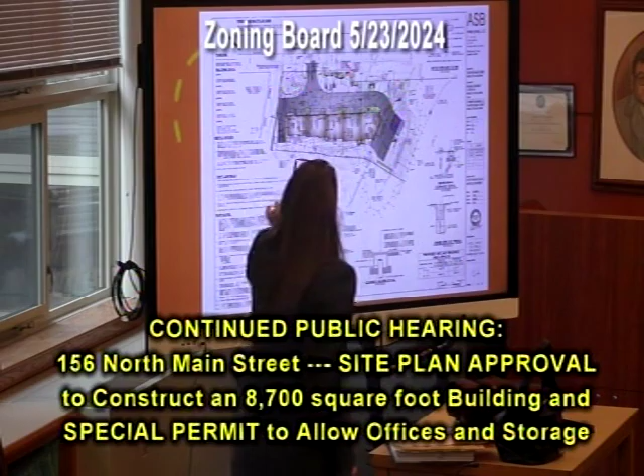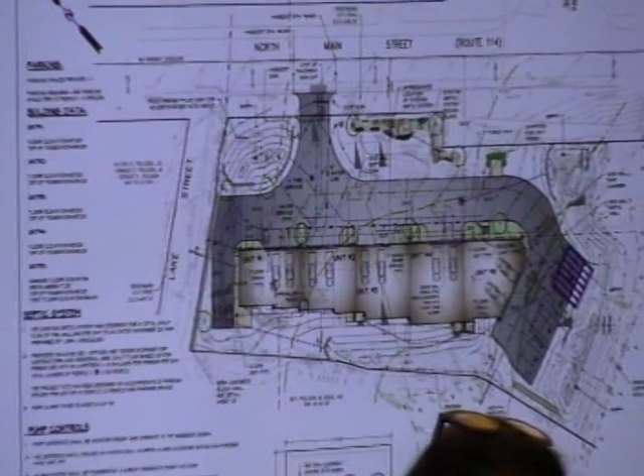So the first thing I'm going to go through is basically the overall site plan. One of the big questions was how do you address the need to have the tight tanks on the property, and where are the grates on the property. So we have a drainage trench in each of the units in front of the overhead doors, which is required by the plumbing code but hadn't been shown on the last plans. We showed them in front of each unit, including the one angled toward the back. All 4 of the front units discharge to one single tight tank located in this area, and unit 5 discharges to a single tight tank, hard to see, but it's right in this area. So we showed that we have sufficient locations to handle the sizing of those tight tanks and the need for drains inside each unit.

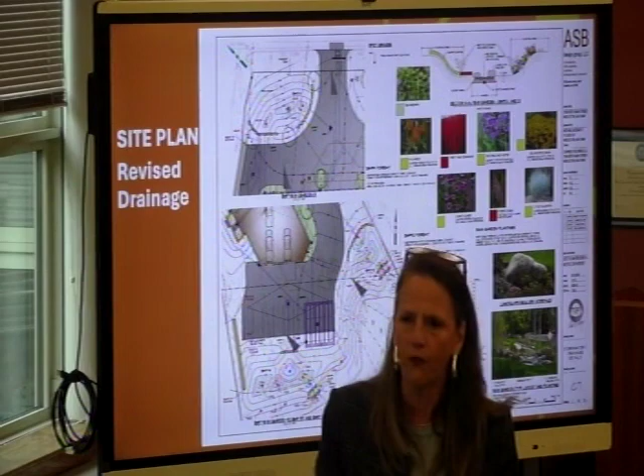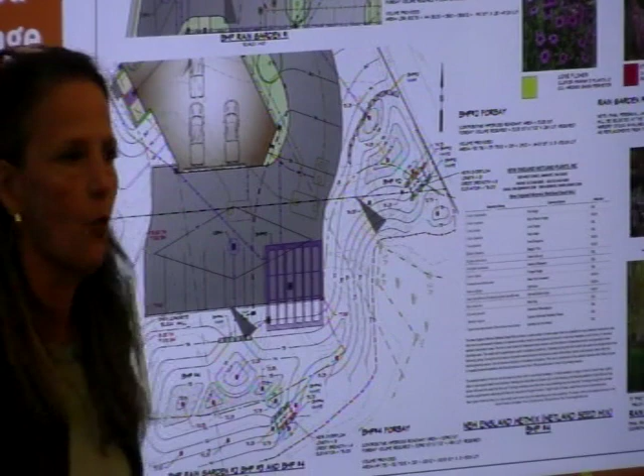The next issue was brought up by Mr. Renault, about overflow issues relative to a couple of the drainage basins - the model wasn't correct. So we had our engineer go back, look at it, and we submitted that earlier to you to take a look. What we have is the installation of a weir in this area, which is just a dam to hold back water and then allow it to flow so it doesn't just overflow, which was the issue raised by Mr. Renault. We have a weir here, and we have a weir here.

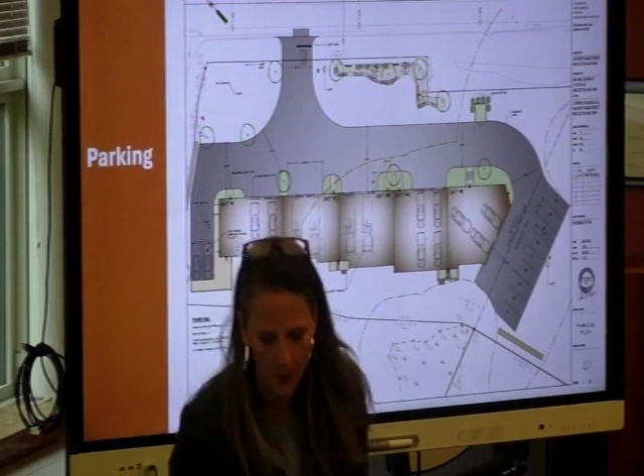The third issue that was brought up was some confusion relative to the parking. The parking is shown on sheet 5. That sheet set has so much information on it that it's difficult, so it's easy to miss something. Basically this sheet is just saying we can have a maximum of 12 employees on site, assuming 3 in 2 of the units and 2 in the rest of the units, for a total of 12 employees. At 1 per 1.2, we need 10 spaces, and we have 11, so we have more than we actually need.

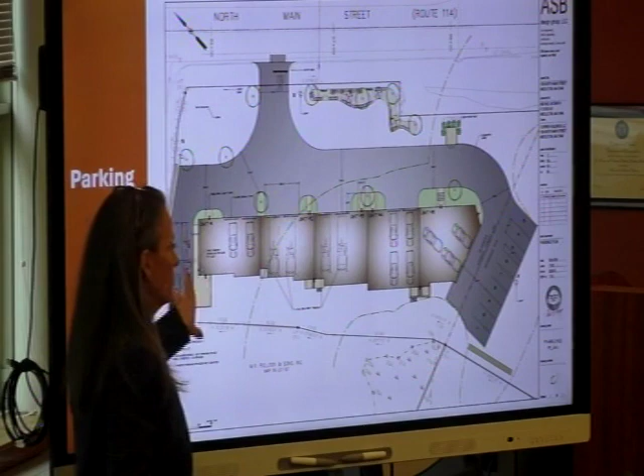The other requirement is that any company trucks need space, and they will park indoors. As was raised last time, the man buying and developing the property owns an oil distribution company, so he may park his 2 trucks inside. He could have up to 5 trucks, so we do have extra space because we're required to have 10 outdoor spaces, so we could actually put one of the trucks outside if necessary. So are you requesting trucks outside as well, or just inside?

Both, just general parking. It's not any form of storage, it would just be parking. It wouldn't be like trailers or anything of that nature, or any equipment, just his trucks. But for the most part, they'll be parked inside. That's the preferred way to store these types of vehicles.

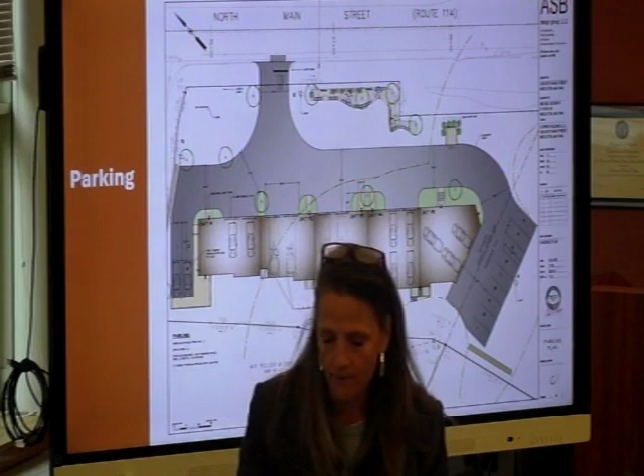So down here at the bottom, we just described, and I recognize that our parking calculations are odd, because instead of saying based on square footage, we say based on employees. We're estimating at least 2 per unit, plus.

Where are you with your... well, let me back up. So has this site always been just a vacant lot that we know of? No, it was a house. There was a house there back in the 60s. It was a single-family home, and it was actually zoned single-family.

Where are you with MassDOT on this? We've started some small discussions with MassDOT. We aren't even close. We don't even have the 25% done.

And is the driveway shown on the plan - because I read it was for construction access - is the intent to have access right off of 114, or off of Lake Street? It is off of 114. Lake Street is a private way for which this property has no access right.

Okay, so, because I was out there and I have a picture of what kind of looks like a driveway, but it's certainly not a commercial driveway. I know something's there, but some bituminous curb that kind of goes into... I don't know if you want to take a look at that.

And that was right on 114, right? Right, yeah. That was the old house. So MassDOT hasn't responded to this yet. Not yet.

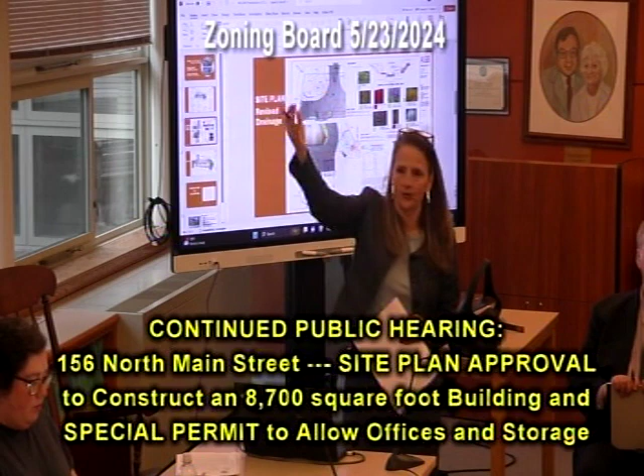Oh, done. We actually went out and they approved it. You mean Natural Heritage, because that buffer area up there - we actually went to the Conservation Commission and they were happy, because what we are doing on this site is, you went there and saw it, there's a lot of litter, for lack of a better term, in the buffer. So this particular project includes full mitigation for that prior dumping. They were very happy with that, because that's where all the new species are coming in, so we'll replicate the area and clean it up.

Okay, anyone have anything else? Hearing none - is there anyone?

The comment about the steeple bush - as much as I've taught about invasive species, I've never heard of it. I'm not finding it on the Audubon website. I don't see it on the Massachusetts invasive species website either.

Can we say what list are we going off of? Because if you can't find the one we're trying to get it off, then how are they supposed to enforce it? Well, that's what I'm wondering.

I'm wondering if we could draft a condition so that the conservation agent would know. Can we make it broad enough to say the planting shall not include any identified invasive species in the Commonwealth, as reviewed by the conservation agent and the Conservation Commission? Let's do that.

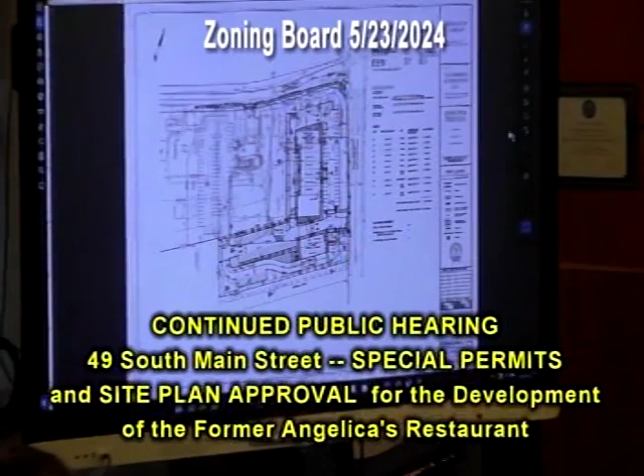I'll go through the civil engineering. Good evening, again for the record, Joe Piznola from Hancock Associates. So I guess I'll just start with the general site layout, just to refresh the board's memory. This is a 2.85 acre site.

It's the redevelopment of the Angelica site, Dogleg. We've got 2 main buildings. Right now we're showing them conceptually broken up into 8 tenant units, in the first building, what we call the north building, and then 2 units in the south building. We're calling most of them retail, with one restaurant, one fast food in the north building, and one fast food in the south.

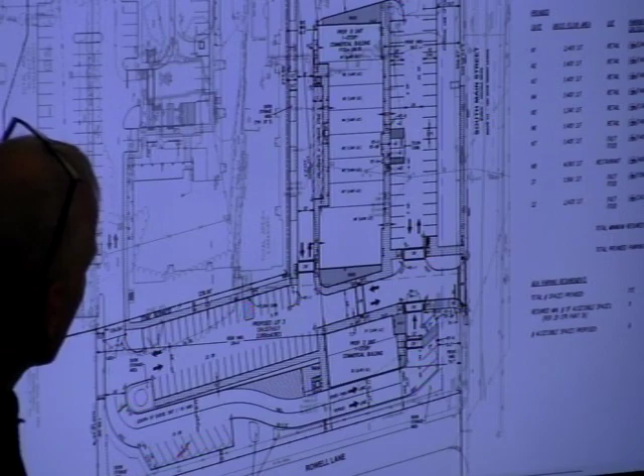Generally we come into the site at one location, 2-way traffic circulation around the main building, 2-way into the back parking lot, and then a 1-way double lane with a drive-through and a bypass, with 4 spaces down front, 2 of which are handicapped.

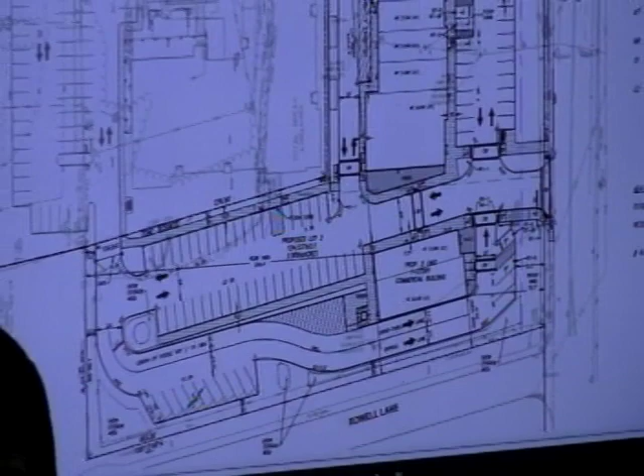It is a redevelopment project. We are reducing the total amount of impervious on site by 16,000 square feet. Generally we're making minor grading changes to the site to address capture of stormwater and treatment of stormwater on site, and to reflect the needs of the grades around the buildings for handicap accessibility and maneuverability around the site.

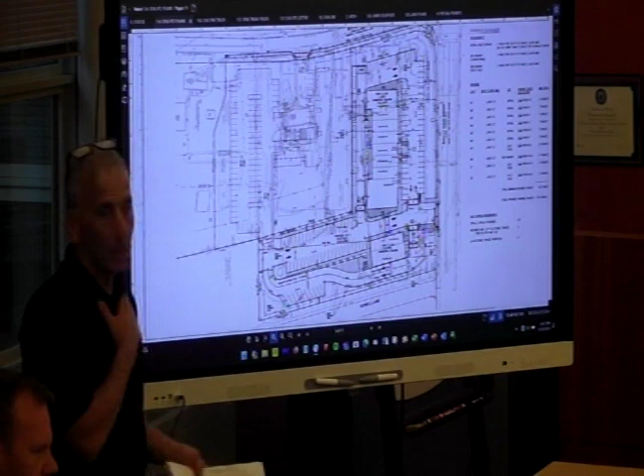A series of crosswalks and connectivity and sidewalks through the site. In the back, there is a gated connection to the 40B for emergency, but that would not be usable to either the residents of 40B or the customers in the retail section.

As far as stormwater, again we're considered a redevelopment project, so running through the 10 standards kind of quickly. Standard 1 is that we don't have any new untreated discharges, and we don't. Currently the site has some drainage, with on-site catch basins and a connection with an 8-inch pipe to the state drainage system in Route 114. That we are maintaining, that is going to be our continued single discharge point, but we are, as I will describe, making major changes to the system to make some vast improvements with regards to meeting the standard.

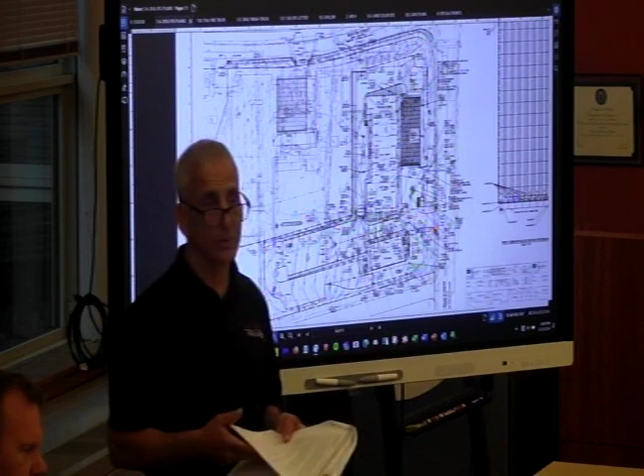Standard 2 is attenuation of post-development flows, and we've outlined a system that reduces the peak-to-peak flows for all storms up to and including the 100-year storm. That is done by way of reducing the amount of impervious, but also we have an on-site underground detention system, which I'll get into in a moment.

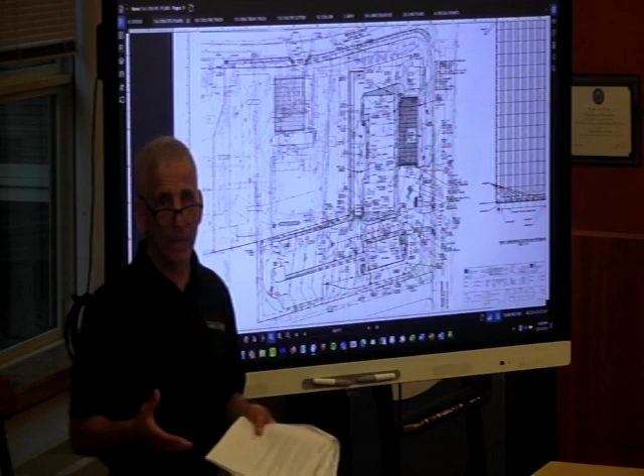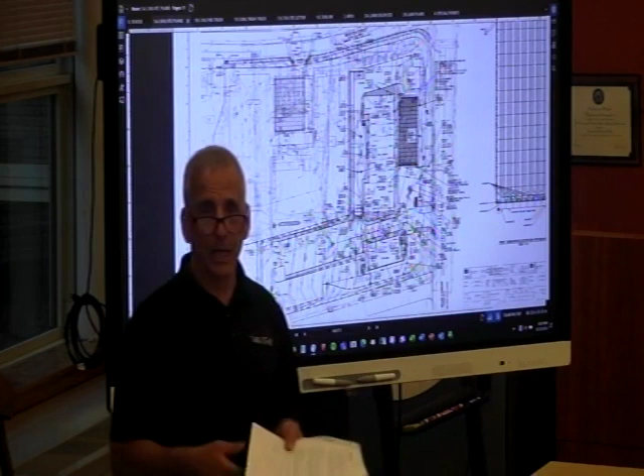With regards to that, what's happening right now is there's a lot of stormwater that just goes out into 114. As you know, it's kind of a wide open curb cut, and through the development of the site with the parking being pulled back from 114, which has been the discussion of a lot of the traffic comments, leaving a strip for future improvements in that area, it also confines our drainage onto site so we don't have this rush of drainage onto 114. So it makes it a little challenging because the only way out of the site is that 8-inch pipe, so a lot of our design is driven from controlling the flow to that 8-inch pipe.

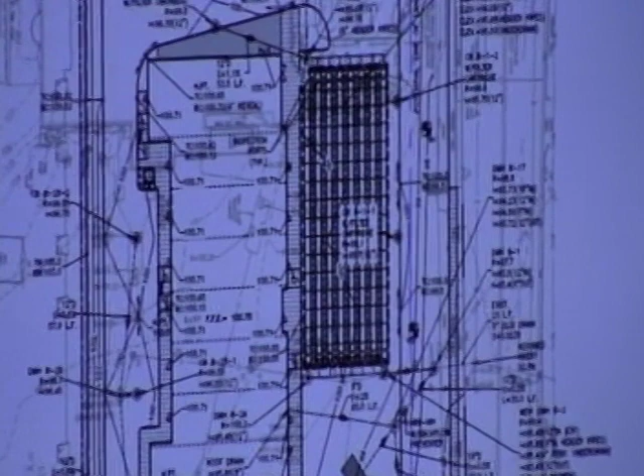So you'll note that there's a large underground detention system in front of the north building. If you recall from the 40B, we did have this system, it was noted as System P3. It was located in the upper section of the retail site. We've relocated that to make it more conducive to the site layout and so forth. So that system, when we proposed it under the 40B, was again knowing that the 40B was going to discharge to that same 8-inch pipe, and that the goal on the 8-inch pipe was not to have the system surcharge in any storm up to and including the 25-year storm.

That's still the goal, that's still what we're using it for, it's just a little bit reconfigured. When we had proposed it prior, we proposed it as an infiltration system, and when we went through all of the discussions in the past with regard to the concerns of groundwater for our neighbors to the south, coupled with the fact that we are reducing the amount of impervious and we don't have the greatest soils down there, we're taking advantage of being a redevelopment, and we're not proposing any infiltration, any recharge.

So this system will be a detention system. It'll have a poly liner, it'll be lined, so there'll be no water going out to the surroundings. Its sole purpose is to hold back water and to let it out slowly and controlled, respecting the fact that we have that 8-inch pipe and we don't want to surcharge up to the 25.

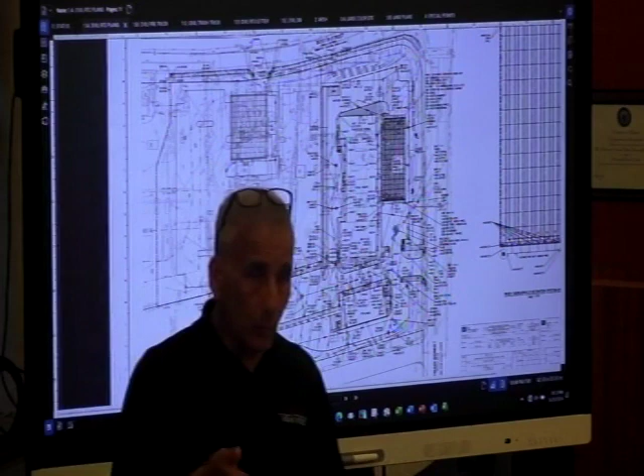So that brings us to standard 3, which is recharge. And we're using the redevelopment allowances of maximum feasible compliance, as I just described, to not provide recharge. And the recharge, the maximum extent practicable here, we're saying is reduction of impervious is providing that little bit of recharge in the additional green space.

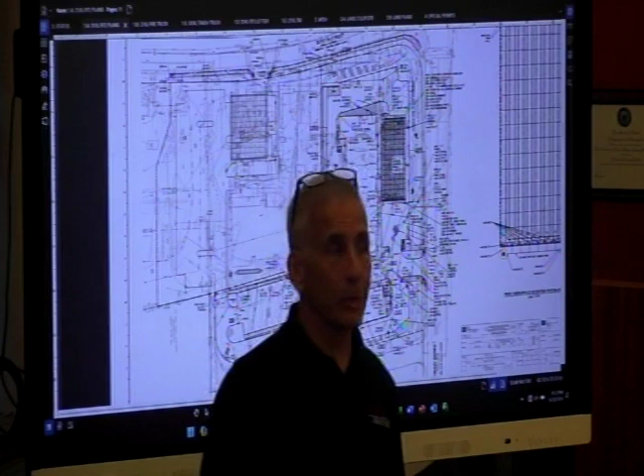The next standard is treatment. We are connecting to a state system. We have the additional heightened requirements for the MS4 of not only treating total suspended solids, but treating phosphorus. So we do have a comprehensive system of proprietary treatment devices, two to be exact, that we're implementing.

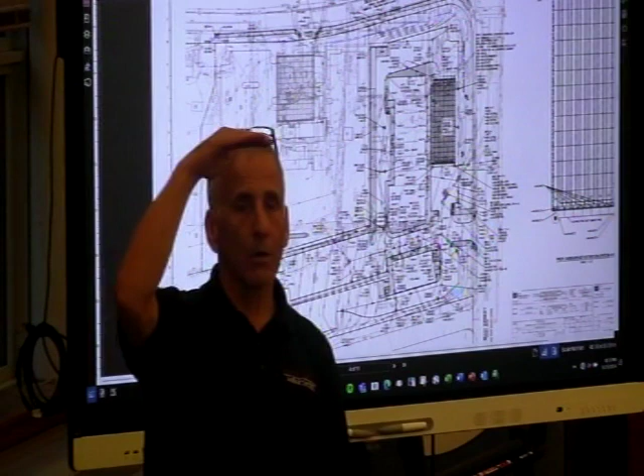For the area on the south, that drainage will be collected through a series of deep sump hooded catch basins, which will be brought down to this point right here, where it will go through what's known as a jellyfish treatment device. It's a filter cartridge system. It's got proprietary filter cartridges that are 54-inch long. There's some kind of a filter media that have 11 tentacles inside the filter cartridge, which is why they call it a jellyfish. And that provides treatment of, number one, phosphorus, but it also will treat a whole host of other constituents. So that has an internal bypass for larger storms.

It's sized in accordance with the manufacturer's recommendations for sizing, for the amount of water that we're putting through it. And I'll go over what treatment storm in a moment that we're doing. But it is a system, it requires maintenance, or monitoring, maintenance, all of that, which is part of our O&M.

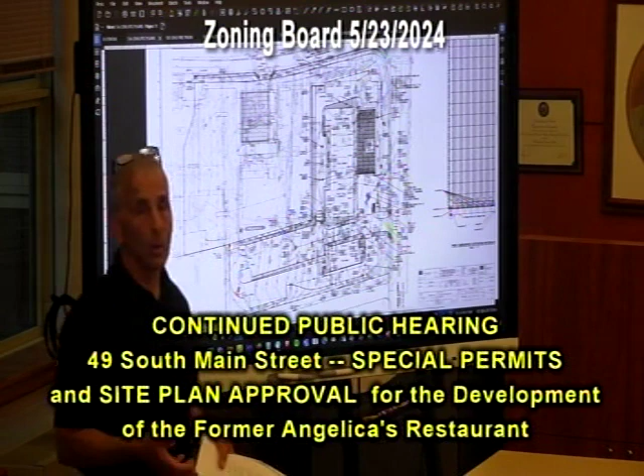The second treatment methodology that we're using is a system by a company called Ferguson, and it's catch basin inserts, and it's another filter cartridge system in which right in the catch basins themselves there's a cartridge chamber, and each catch basin has two filter cartridges. Those filter the water and again have phosphorus treatment and total suspended solids treatment to meet those rigorous requirements. And those are mainly on the north part of the site where we don't have direct access to the jellyfish and can't funnel it through those. So I believe we've got 4 or 5 of those catch basins that will provide that additional treatment.

Question while you're going to the next couple of things, and I'm sure Mr. Renault will have several questions. I have just a couple.

One, we are discharging into the state system, is that right? We are. Okay, and I know traditionally the state has not allowed that, so I'm presuming that you're negotiating this with DOT? Yes. To allow you to discharge? Allow us site drainage? Allow us to continue to utilize the existing pipe. Because I know they generally don't allow that. They don't allow, they definitely don't allow new connections to their system.

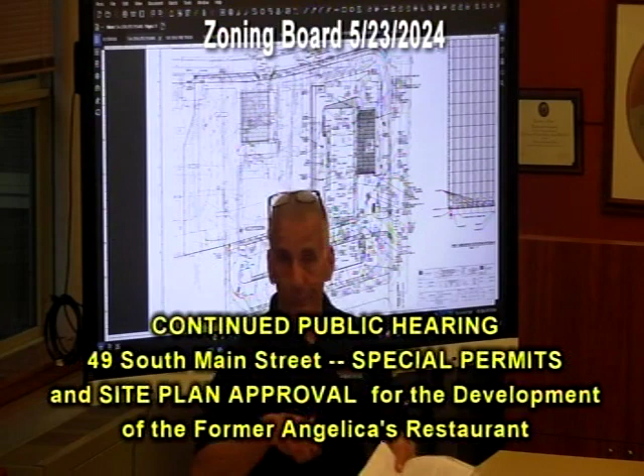This is an existing system, and our arguments have been that we are stopping quite a bit of unfettered discharge directly surficial to the state roadway from a standpoint of treatment, no treatment, icing problems, flooding problems, all of those things that are better, and that we're doing all of the work that I just described with regards to not overwhelming that 8-inch pipe, not looking to increase the size of that pipe or anything like that.

So, and I guess my second question to that was, do we know where this outlets? Where does the state system outlet? It goes to the north up to the next intersection, or north of the Boston Street intersection, and then it outlets to the east.

Behind Memorial Hall, it's like a box culvert, the drain from the pond. There's a big box culvert that drains the pond, and I'm assuming it's going into that.

Next is standard 6, critical areas. We are not technically in a critical area. We've had discussion with TEC, who says, well, you're not, but it is the Ipswich River watershed, and that watershed is strained. It's about water quantity but also quality. So what we've committed to is treating to a higher degree, treating to the 1 inch, in accordance with the provisions we'd be under if we were in a critical area. The treatment devices we're picking, the filtration, is definitely warranted or required when you're in a critical area.

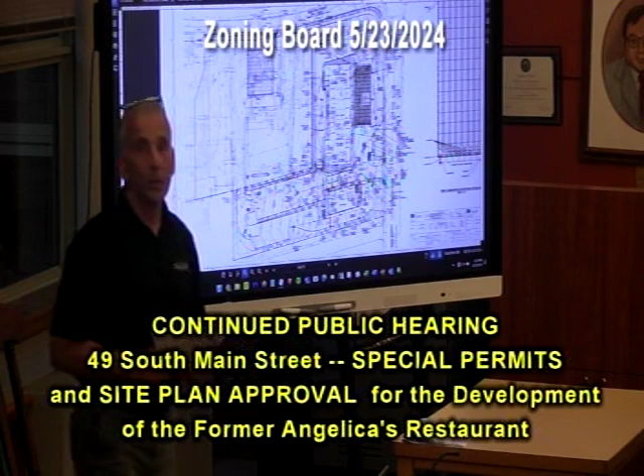So that is the stormwater system. As far as the rest of the utilities, for water we are connecting on Route 114 to the existing 24-inch main, bringing a new 8-inch main onto the site. That will service our on-site hydrants. We'll have domestic connections and fire protection connections to the buildings. We'll be sub-metering the tenant spaces, so there'll be one main meter per building and then sub-meters for those. We'll have to deal with Danvers Water, and we're doing that collectively with the 2 projects, but we have done hydrant flow tests at the site and provided that information. As expected, there's no issues with volume or pressure with the 24-inch main on 114.

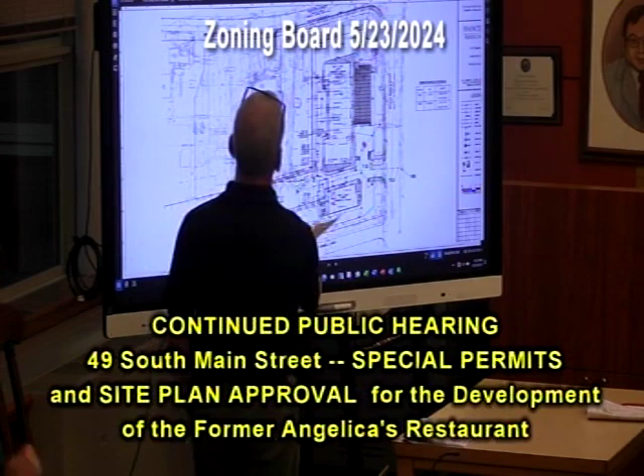With regard to septic, we calculate the total flow between the restaurants and retail at just north of 9,000 gallons per day. We have an existing on-site system that Angelica's was utilizing, which was upgraded in 1990. We did some initial investigation of the leach field, which is in the dogleg parking lot. We inspected the distribution boxes and pump chambers, and excavated around the area to make sure we had good depths to groundwater.

We are not certified Title V inspectors, we don't have any on staff, but we brought in Title V inspectors to do a full Title V inspection of the system. They passed the system conditionally. Their issues, outlined in the report, are with regard to the tankage—there's age and issues with the septic tanks, the grease traps, and the pump chamber.

Our plan is to utilize the effluent field, which is sized for 9,580 gallons per day, and to put in all new tanks, grease traps, and a new pump chamber. We really have to do that anyway to reconfigure it around the new buildings and make sure we've got the grease traps where we need them for the restaurants. So we've got grease traps and septic tanks for this restaurant component, grease traps and a septic tank for the restaurant portion here, into a pump chamber, and we'll refresh the force mains up to the 2 distribution boxes, then utilize the existing fields.

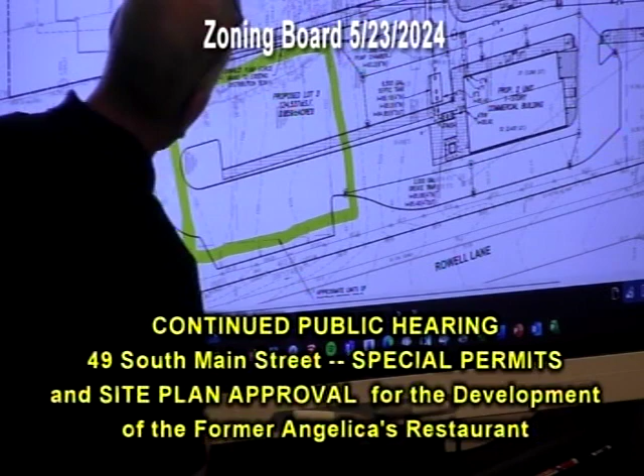I'll zoom in, it's kind of tough at that scale. This is essentially roughly this area. That's what I thought it was. We don't have a clear picture, it's just hard for us to see because he's standing in front of it. Okay, good, now get out of the way. Great, I can erase the green thing.

I just wanted to make sure it was clear why that was hard to see. That helps a ton. They just couldn't see around you, Joe. Kind of a combo of a couple things. Right, it's down, I see the line now, yep, I got you, right there.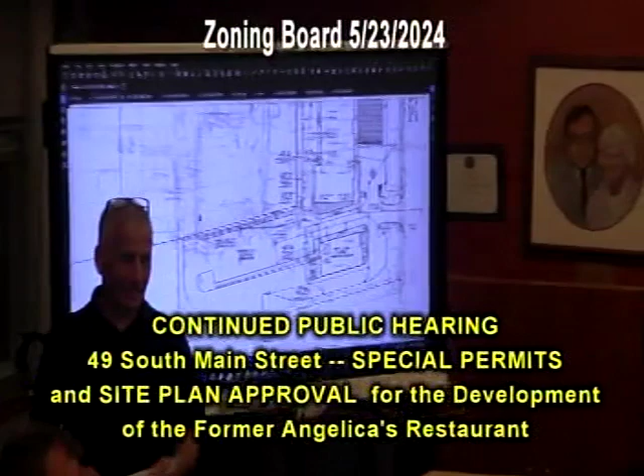That didn't help, yeah, we actually traced them all out. The Sewer Brothers, that's the company name, came in and snaked each line, and the snake has a sensor on it, and then they located them and painted them, and we located them. So we've located all of the individual leach lines and confirmed they're all fine and flowing. And when we did the excavations, we were close enough to the system to see the biomat and see that it looked pretty healthy.

Still not any watering for a while, right? And that usually dries them out. December 2020, yeah, that's a while. And this was last summer.

So you didn't do any excavations near the biomat or anything to make sure that it's dry? You excavated by it and through it to make sure it actually will allow water through it? Yeah. Okay, is that a report anywhere? Because I didn't note that anywhere. Do you have something yet? It's not in yet, no, but we can supplement. Yeah, that'd be good.

I mean, so with the flow from before, have you looked at how much flow? I know it might have been sized for 9,000 gallons. Do we have any idea of how much water was actually going in before? I'm just trying to get ahead of the question on the mounding analysis because it's right against the property line, so let's be honest, we know that's going to come, and how we address it.

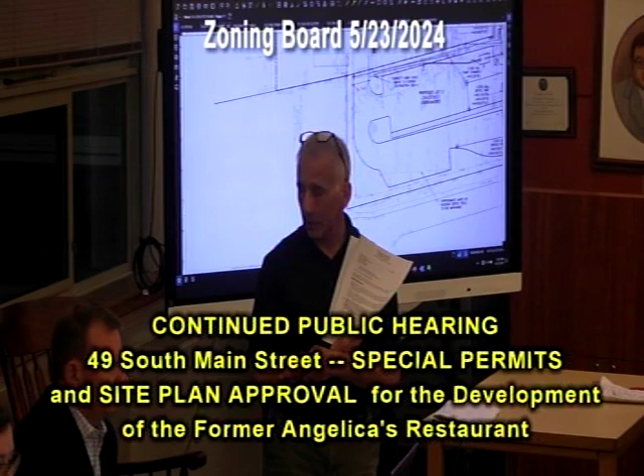Yeah, did we get any water meter readings for the restaurant? We did, but it was like the water meter for the last 3 years, you can get through the Danvers website. I've got some older ones. Could you potentially get that for us just so we can get an idea? Yeah, because what we were constantly pumping at that level.

What we did then was look at the occupancy loading, the allowed fire department occupancy loading for all of the aspects of Angelica's. It's crazy, if they put that many people in there, I don't know where they'd park, let alone how much water they'd put through it. But that's two different things.

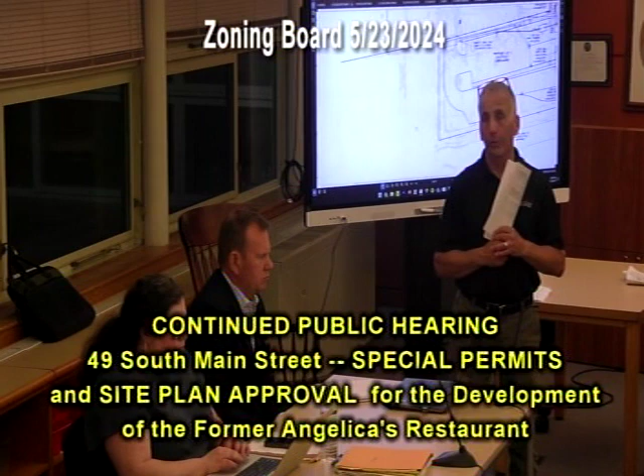It was sized in 1990 for the seating capacity that was there at the time. Obviously it was sized to stay under the 10,000. But yeah, we'll go back to a period when it was being used to look at what those flows are. For me to be comfortable, I'd need that, and at least to see that the biomat isn't a big solid mass now.

I've been in my own excavations seeing that usually after a few years, without it getting the air or without it getting the liquid, it can definitely tighten right up.

Stormwater-wise, while I've got the floor, I'll go if that's good, Mr. Chair. Do you mind if I keep going? Yep, keep going. Yeah, I mean the detention, I get the concepts.

I think ideally, if you have soils in better places, you'd try to get something in the ground, that would be ideal. You'd like to have it actually infiltrate into the system? Yeah, infiltrate something. That was the question.

I get the concept, I mean if you don't have the soils - looking at it, there's a bunch of peat and stuff on site, so obviously you're not infiltrating through there. Maybe just show kind of from your test holes where the areas are, because a lot of this also is sand.

So, just to understand where that is versus your bad material and your till. So it looks like you get the whole gamut. Maybe just showing that on a plan at the next meeting would be helpful, just so I can conceptualize it.

Okay, the other thing we can do is look at the two projects as a whole. What would the recharge requirement be if this was a vacant site and we put this much impervious, and the 40B impervious? And how much bang are we getting out of the system up on the 40B? Maybe setting some of it further down, and using a hybrid of detention versus infiltration.

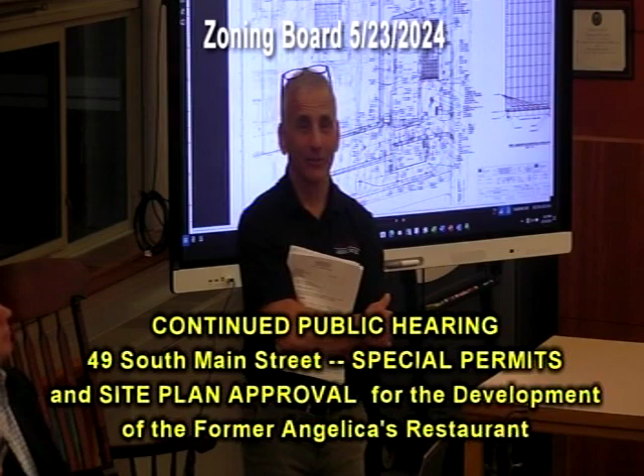No, I do have one question, and it's either for you or for Bill. I'm not familiar with the treatment devices that you're proposing. I'm presuming they're something new? Jellyfish has been around for a while.

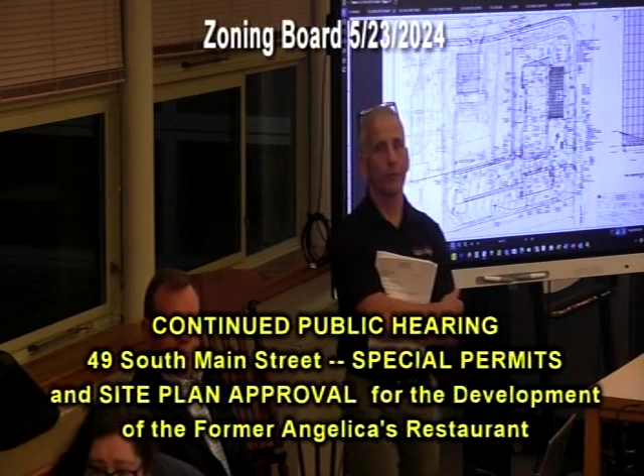But these first ones you were talking about, before we get to the jellyfish, the filter cartridges, the concept is not new. I think Ferguson's product is new, but the type -- are you familiar with them? Yeah, we're using them. Not that exact type, but that type of treatment, I'm using them myself.

And my concern would be the maintenance of these devices. While Lars and his team may be very diligent about that, at some point the property's in different hands, I don't know, 20 years from now, whatever. Is the maintenance of these devices -- Bill, I defer to you on this -- going to endure over time, or is it just going to be one of those things where we put it in and 5 years later it craps out and never gets fixed?

It's a great point, and I think long gone are the days that we can live with deferred maintenance. We're at a point where these systems are complicated enough, they have to be maintained. I think the state of Maine is on the forefront of making sure that maintenance gets done on stormwater. A lot of towns require site owners to report annually that they've done it. What Maine likes to do is require that you provide evidence that you're under a long-term contract with a qualified stormwater maintenance company, and that's how it gets done.

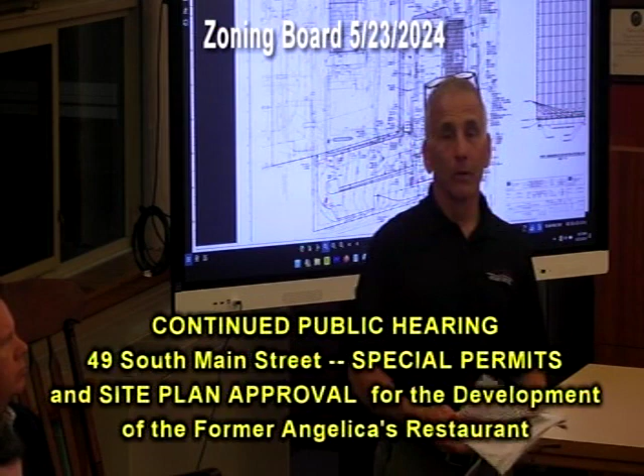But if the only motivation is he's got to do an annual report, that puts pressure and onus on the town to say, did we get that report from 49 South Main Street? Some towns - we want this to be maintenance free for the town. And I think that's the evidence we need to prove. So if there's any question on whether you've maintained your system, can we see the contract? Can we see the bills?

Yep. So, anything else on the site plan for anyone? Anyone from the public have a question on the site plan? Yes, sir, name and address please. Fred Feldman. Specific to the civil, though.

Yeah, specific to this. You might have explained it and I missed it - is it missing from there? I know there was an infiltration chamber in that far corner, is that incorporated into that large rectangle? Yes, there was an infiltration chamber that was required to go in that far corner there, up in here.

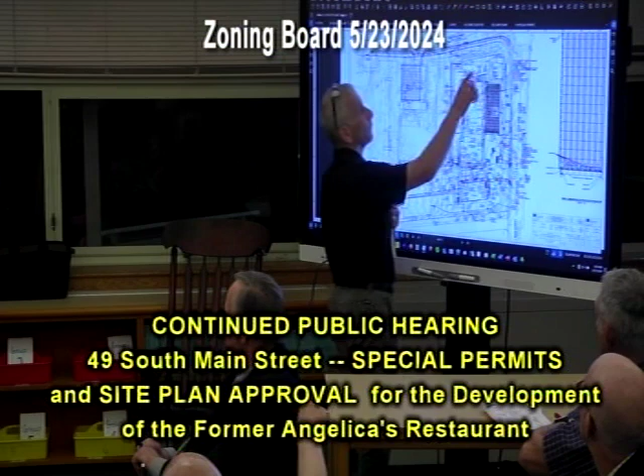Is that still there? Is that on this plan? No, that is not. We've eliminated that as an infiltration basin, underground infiltration, and relocated it here, and made it a lined detention. Okay, so there's no infiltration chamber from the other one, right? But there's no infiltration - no groundwater leaving that. It's got plastic on the bottom, all it's doing is slowing the water.

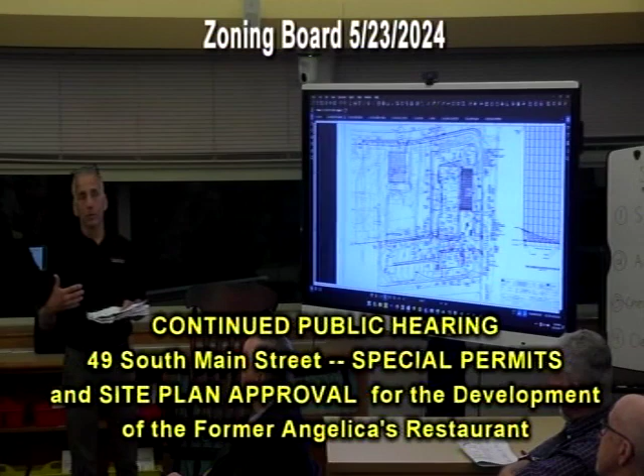And that's the one that the TEC required from the 40B, now part of that? Yep. Okay, and the other question is - oh, I'm addressing the board, I'm sorry. Sure, okay, I'm addressing the board.

The gentleman had brought up the point that it's approaching the 10,000 gallons per day. So I'm readdressing my question since he brought it up - since we're approaching the 10,000 gallons a day, and he wanted to be sensitive to the abutters, I don't know if you could consider the combination of the residential and the commercial. Since we're talking about the commercial approaching the 10,000, I don't know if it combines both, since he's talking about both, if we could revisit and look at the implementation of the groundwater monitoring program for this, since this one approaches the 10,000 gallons per day - can we please look at implementing the groundwater monitoring program for this, and that will combine both for peace of mind?

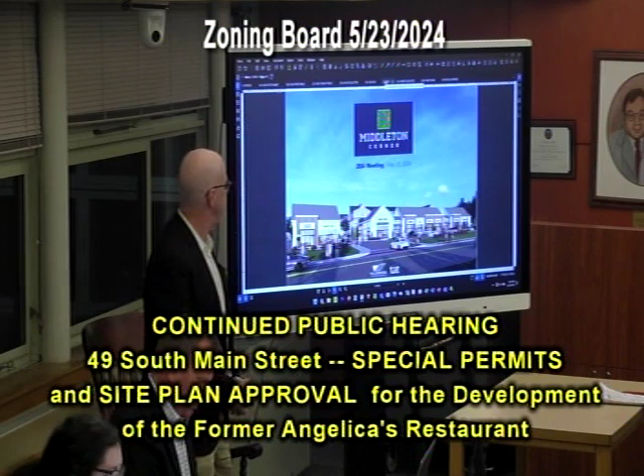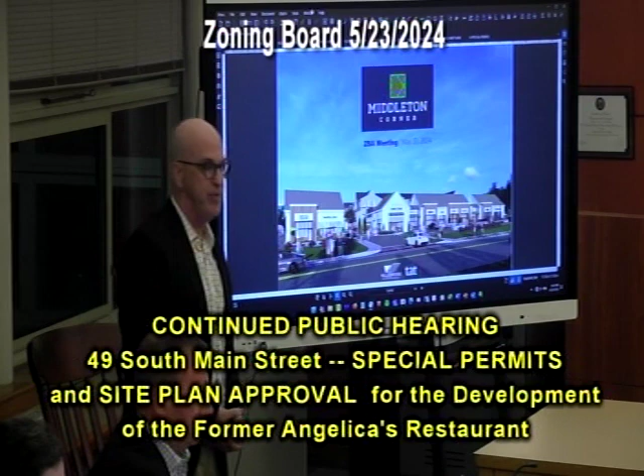Good evening, folks. For the record, Ed Bradford, principal with TAT. As Lars noted, we finished our presentation of the architecture at our April 25th hearing and left with a little bit of homework. The design we presented proposed an alternate design in place of our original application, showing a flat roof version. The sloped roof version we presented at the April 25th hearing was, we think, well received. But again, we left with a little bit of homework.

Sorry, I screwed up. Can I ask a question before he moves on?

When were these submitted? These drawings were submitted last Thursday. I don't know that we got to it. It was in the same folder link as everything else that was sent in, the civil plans we just showed. Well, we can see them and we'll talk about them, but it means we have the rule of submitting 10 days ahead of time, 7 to 10 days prior. But we didn't get them, so that's my concern. Okay, they were sent to the town? I'm checking, sent to Jackie too, Justin, Lisa. Okay, all right, well, let's go through it.

So this does show the design that we presented at the April 25th hearing. Again, we felt the design was pretty well received, the sloped roof option replacing the original flat roof version. The main commentary, or criticism if you will, that we heard from folks was what could we do to reduce the visual impression of the roof from South Main Street.

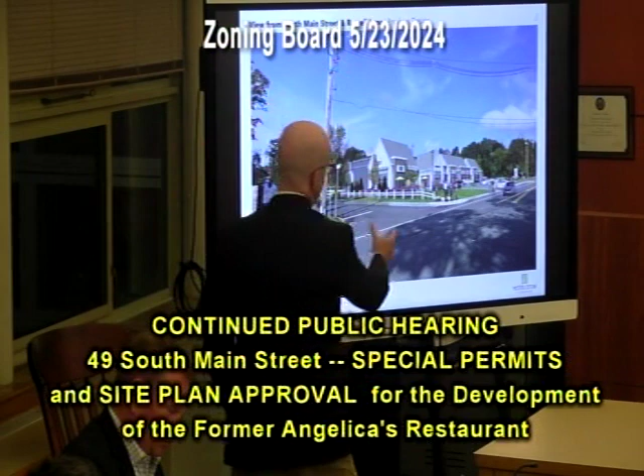So it was suggested by some folks on the board that we look at a couple alternatives. One was just to reduce the pitch of the roof. We have that option. A second option suggested to us is could we consider introducing a flat portion between the kind of bracketed ends. We have that version to show you as well. And then we came up with a third one as we were working through these that we'd like to share with you.

So I have 3 vantage points from South Main Street to show you. This is the vantage point at the intersection of Rowell Lane. Again, this is the design presented at the last hearing. The roof pitch on this one is a 12 pitch, so actually pretty steep. Option A is a version that would simply take the suggestion of lowering the pitch of the roof.

So we go from a 12-12 pitch to a 9-12 pitch. A 9-12 pitch is about the pitch of the roof of Memorial Hall, we believe, so across the street there's a certain logic to being in keeping with that roof slope just across the street. We think it's a pretty dramatic change on its own. Again, a quick before and after: that reduces the ridge height by about 3 feet. So not only a dramatic visual adjustment, but a reduction in the ridge height as measured in the building height.

Option B, which will be better shown in some other vantage points, introduces a gable on the north end of the north building. If I go back and forth, you can just see that appear. That's the only adjustment in option B. Again, you'll see that better in the next couple of vantage points. Option C, by the way, that is the new version. We didn't really discuss that as an option, but it was something that occurred to us as we were working through these various designs.

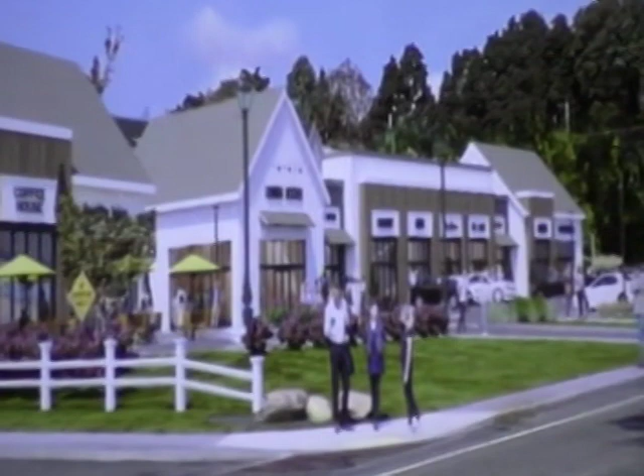This didn't gain as much advantage as we originally expected, and I think that's because that roof still has to do a certain amount of work to screen the mechanical equipment behind. So there's still substantial parapet required to screen that equipment from South Main Street.

But we wanted to put all these options on the table for folks. Moving up the street a little bit, this is the second of three vantage points to walk through these alternatives. Here's a view, again from South Main Street, now moved a little north, just opposite the driveway entrance to the site. More of an elevation view.

Again, this is the design we presented at the last hearing, a 12-12 pitch. There's the lower slope version moving to a lower 9-12 pitch. So we're talking about having a bit more of a connection to the residential building behind, a visual connection. We think that adjustment does a lot of work in that regard.

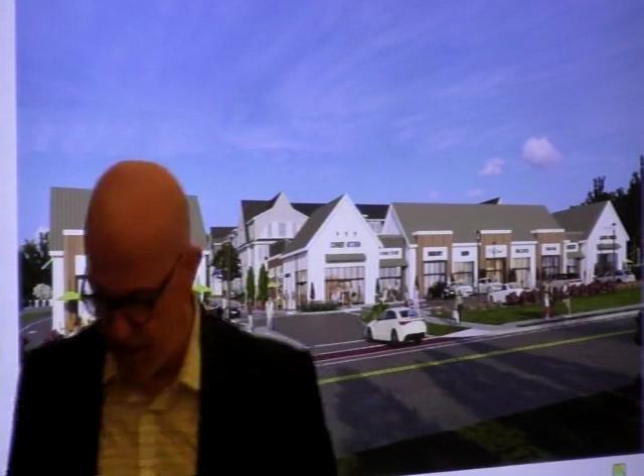Here you can see a little better our idea for option B, the introduction of a gable roof to the north end. What we're trying to do there is reduce the amount of roof surface visible from South Main Street. What it actually does is, in fact, it does do that—it reduces the dimension of that roof, but it does introduce a longer section in the middle that we're not sure is successful.

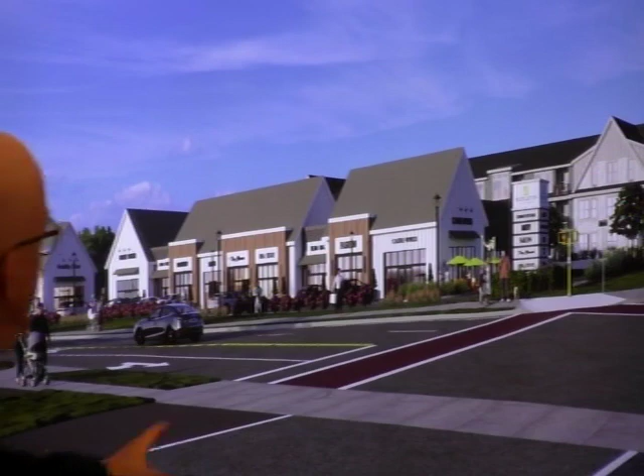And then here is the flat roof, option C, from the same vantage point. This is the last vantage point to walk through the design options, again from about the vantage point of Memorial Hall, looking across the street, Boston Street—the intersection is just off the page. So again, the previous design with the steeper pitch, 12-12 roof.

The lower slope, 9-12. Again, I can do a quick before and after. Here's the introduction of the gable roof at the north end.

So this was one we were actually pretty excited about when we first came up with it. Sometimes that's how these things go—as we spent time with it, it's not our favorite option. We'd love to hear others' positions on it. As we thought about it, what we don't like, to put it on the table, is we think it takes away from the focus on the entry. Having these two gable aspects on each end, from a hierarchical standpoint, is not as successful to us.

The other aspect of this design that was a bit problematic for us, best seen in this view, is it really replicates exactly the massing of the residential building behind—very symmetrical, almost parroting the residential building behind. We think other options are more successful that keep that focus on the driveway, but we wanted to share it because we think it's worth consideration. And then finally, from this vantage point, option C with the flat roof in the section.

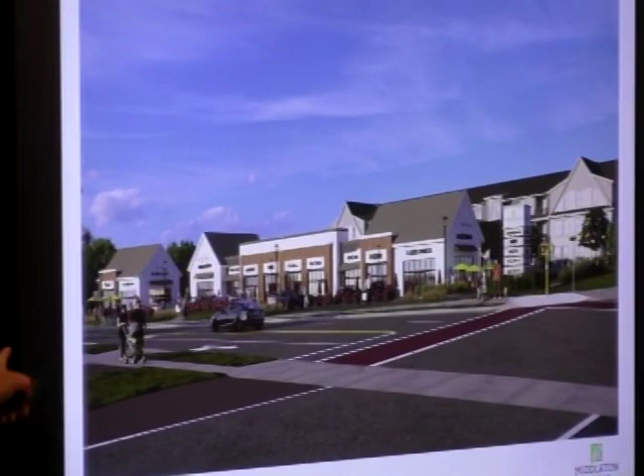I feel like, so, let's go to the members, because we're all jiggly in our seats right now. I'm talking about this, so I'm going to go to Carolyn first. You were the jiggliest. Yeah, no, it's just always fun to see this happen.

So can you go back to the original design? Like, from this view—okay, previous design. That's fine, so let's go to A. Love it. I love that it's down, I'm not seeing so much roof. I also like that with the gable facing Boston Street, it doesn't feel like it's a forgotten side of the building.

If we go to B, I do feel like that's what we end up with on that end if we face that—no direction, frontage on Boston Street, is that what you're saying? Yeah, it just feels like it doesn't feel as inviting from the Boston Street side. And then if you go to option C, it's like trying to be a jack of all trades, master of none, in my opinion.

Ann? Yeah, I'm not fond of C. I like Carolyn's take on this one here. Yep, I agree with that.

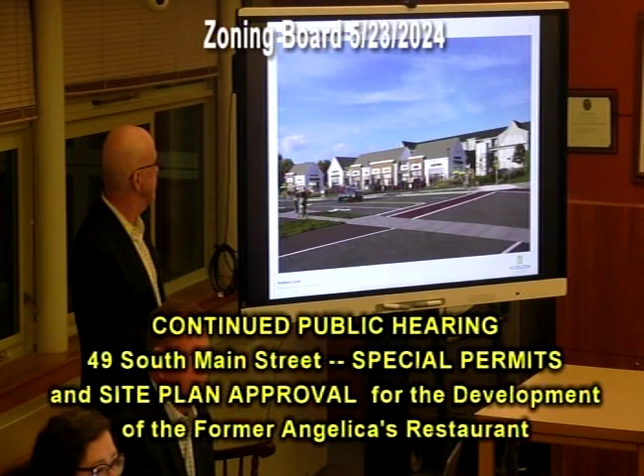And we have to remember, there is a patio there on the right, so it's like an active corner. I think it keeps that and accentuates that patio. Yeah, definitely, I think it looks sharp.

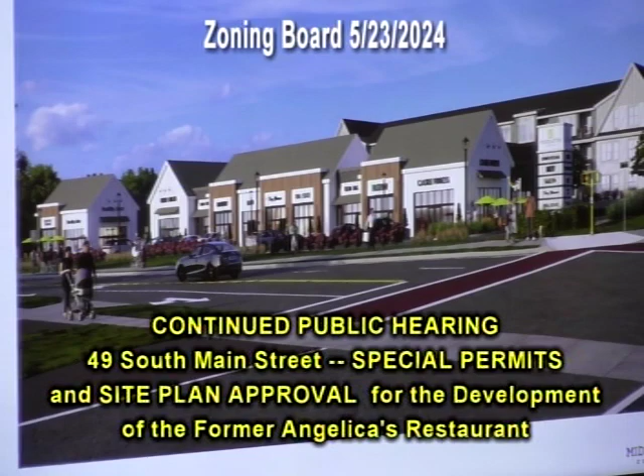I even like the palette in the middle because it replicates the building, the little plaza in town center. I just like the way it broke up the massing. This breaks it up a lot better, I think, with all the different sections, because nothing's really mimicking. You don't have the bookend anymore, so I'm all on board with it.

So I think there's a pretty good amount of agreement. Obviously, we'd like to let our colleague who's not here tonight weigh in as well, but I think we're close.

Who comments? Like A? You like A? Jay?

Everybody's gonna get to weigh in tonight. Chris, you want to weigh in on this one? This is probably the biggest decision that we're going to make today. You like A as well? What about this, Chris? That's okay.

That's gonna be fun for you guys as you embark on this journey together of consultant and planner. Yes, they're all good designs. I do have a contribution, if I may.

I would start with bringing the whole building up and removing any sort of parking or drive aisle in the front, giving it more of an interface with the street. The articulation is good and the lower roof is good, but that big dead space on the roof still is glaring to me.

It could benefit from some smaller gables and some design elements such as those we talked about last time, little window gables. Yes, they have them on the back building. If you can show him those on the back building - little design elements like that - does everybody like it on there?

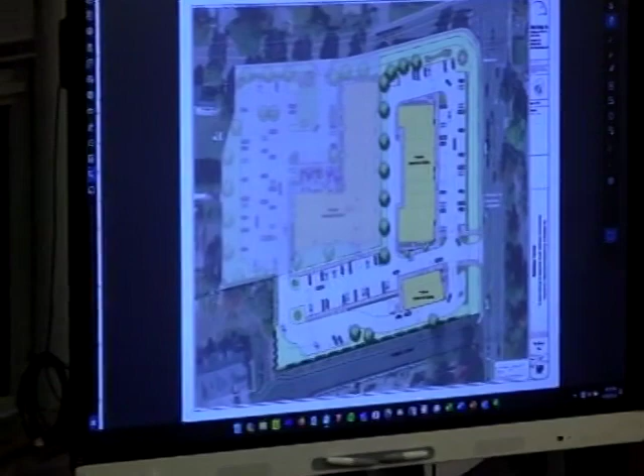Maybe shows the driveway view from the front, Rowell Lane maybe - the view from Rowell Lane, so you're looking for the perspective. It looks like a parking lot when you look there. You don't see the road that Chris is talking about.

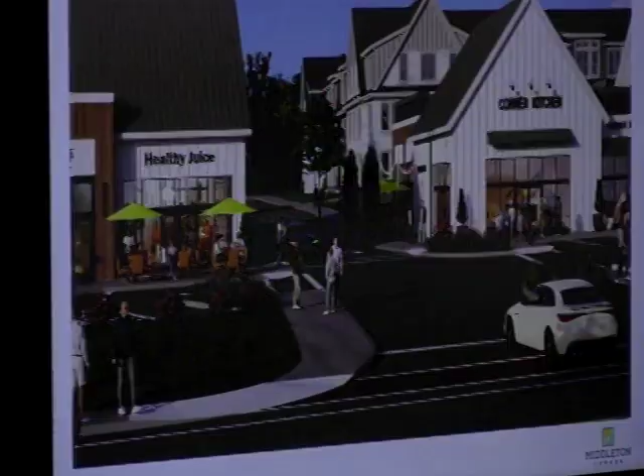You don't have it in this one? No, we do, back up a couple. There you go. Oh, and then the next one. Yeah, no, I remember that one, yep - that driveway view.

So there's parking in the front already, with a road there. Is that what you're asking? In front of the length of the building? He's saying he doesn't want it 70 feet from there, he wants the parking in the back. It sits back probably 70-something feet from Main Street.

Anyone from the public have any comment on this? Any Boston Street neighbors? Yes, name and address, ma'am. Diane Anderson, 7 Boston Street.

If I were ruler of the world, and I am not, I preferred the previous design that we saw in the last meeting. Can we go back to the original? I liked the higher roof line. That's my opinion, if you want it. I liked it better with the higher roof line. Can you go to the second one?

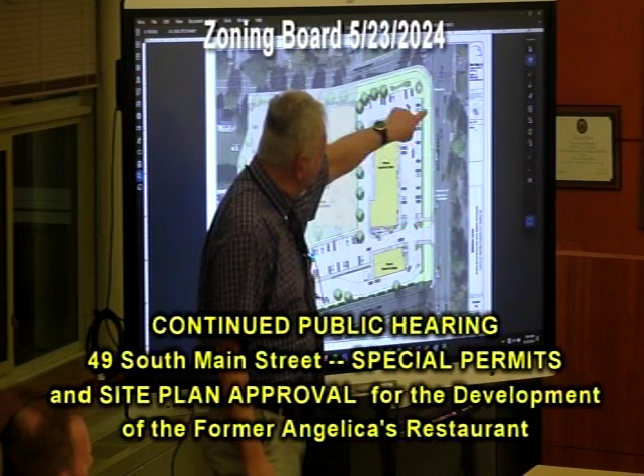Would it be possible to have at least something by the street, a tree or two in there? Even if you're losing a parking space or two, just to get some shade towards the roadway? That was a discussion we had—I was under the impression there was concern about visibility exiting the parking lot, and also visibility to the retail signage. I'm thinking even if it's just two, just to get a little sight distance.

Over here, instead of losing a parking space, have a little planting island bump out, just for a tree or two, because you can slide it further down so you still have your sight distance. It's just to break up that long run. We want some type of shade tree in the road, right?

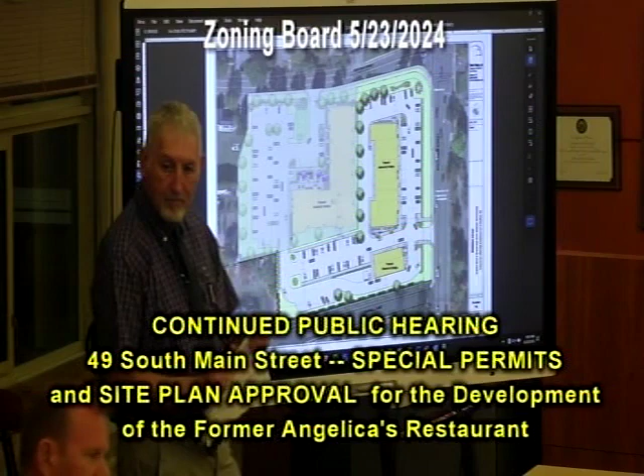Or by the road. Yeah, we can look at it. We would need to evaluate the impacts it would have on how the stormwater management works as well. That's a good point too—we can definitely take a look at that.

Thank you. I'm just curious—a lot of urban tree projects I'm involved with, and I'm sure Bill is as well in his career, use the typical honey locust or Bradford pear. Thankfully, there's not a lot of that on this plan—I'd rather not, thank you. I've used them both quite a bit, and sometimes they work and sometimes they don't. They sound good, but oftentimes they don't turn out so well.

Craig, any comments or questions? Are we gonna have planters in front of the spaces? We do have, we will be putting planters in here for seasonal color annuals during the different seasons. So those will be designated for seasonal planting? Yeah, they are right up by the entrances and stuff.

We're trying to put them where the building recesses back so you can't see them from the sidewalk, the way it was on the drawing. He didn't point them out, so that's fine.

Are the lamps the same as the ones down the square? They are, yes, so they can have hangers on them too. The color is the only element that's not the same. They're the same style, this coach series, and the fixture is the same, but the poles are 15 feet tall.

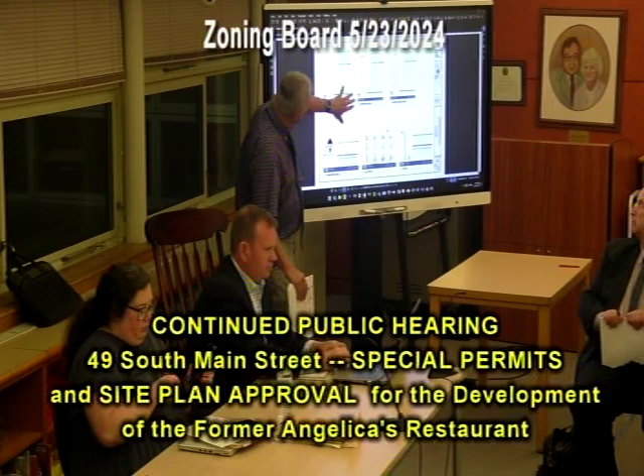Anything else? I think we did okay, that was six minutes. We did want to quickly hit the lights. We have basically two styles of fixtures.

These are the same style, they just have different bulbs and different lighting patterns in them. This is the coach fixture, which is out front, similar to what you have up along Route 114 now. This one here, these are a flat disc with brackets up.

Everything is dark sky, with different shielding to keep light on the property. They are LED fixtures, 3000K, which is a warm light, which is what most towns are requiring now. So LED but lower temperature, is that what you said? Yes.

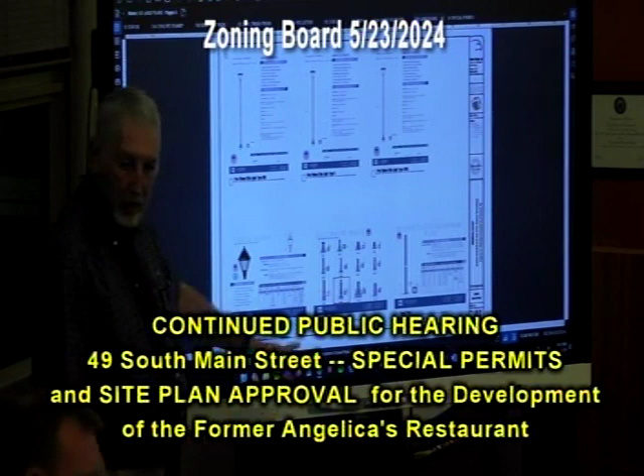Okay, you want to get that plan real quick? No, I think they're good. We're good, all right. Any other questions from the members? Any questions from the public on this?

Yes, sir. Jim Papa, 75 Raleigh. I know she said you're gonna put a well in for the irrigation system. I'm assuming they're gonna have to follow the same Town of Middleton watering restrictions for the well.

There are no restrictions for wells. There should be, yeah. That question actually went to town meeting and failed several years ago. Unfortunately, it all comes from the same groundwater, people don't seem to understand that. This was conditioned by the Conservation Commission.

The reason I ask is with Blue Haven, we have to follow that, it was a condition of the Conservation Commission for the approvals you guys got. You're saying for Rowell Lane? Yes. We don't have that, there's no wetlands here, so we wouldn't restrict that. If there was, it would be on there.

Any other comments? Hearing none. Okay, we're into our last topic, special permits.

Ed, can I use your clicker?

So this is just to follow up on the request from the previous meeting, which was to explain a little bit more why the special permit is being requested, and hopefully worth the burdens it would place on the community. So this is just a quick summary of that thinking by us.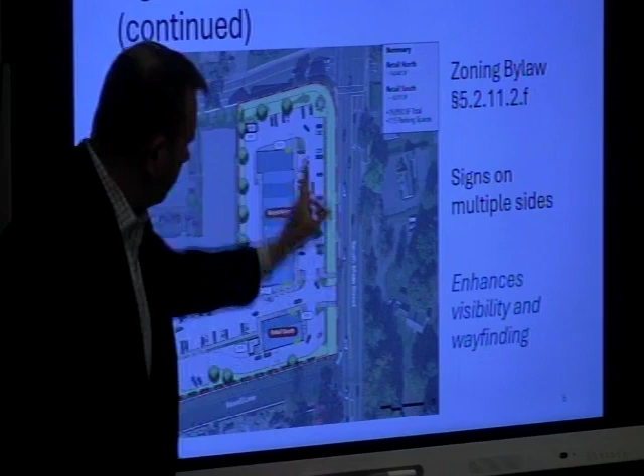The next was signs on multiple sides of the building. So again, 233 South Main is an example, as well as 1 Central at Middleton Green. This helps for communication for motorists, bicyclists, and pedestrians approaching. We are proposing to have signs at the ends of the buildings on both sides, so as people are approaching from either direction, they have quick visibility into those corner locations.

The ground signs being taller than 15 feet—here are some examples. At Market Basket, that's about 24 feet, using Google Earth elevation, so who knows how accurate that is, but it's roughly what the numbers are. The Market Basket is a 24-foot sign. The Angelica's sign site that's there right now is 18 feet tall.

And then 2 other nearby properties, 92 to 108 South Main and 119 South Main, are also 18 feet tall. So while we're asking for extra height, we're seeking 18 feet 9 inches. We're consistent with these sorts of heights of signs, and we're not asking for any increase in the overall total square footage of signage. We're just trying to create a sign that enhances visibility to the tenants that are there.

The next is a restaurant with entertainment. So Maggie's Farm has a showing of TVs over the dining area and bar area. The 99 Restaurant has the same thing. And Teresa's — is it Teresa's or Teresa's? I'm sorry, Teresa's — same idea of having televisions.

These are the definitions of the two, why it's entertainment requires a special permit, but again, our only interest is in televisions at this time. An operator may be interested in doing live music on occasion or something else, I just have no idea, but I know it's pretty standard, people want to see some TVs at the bar.

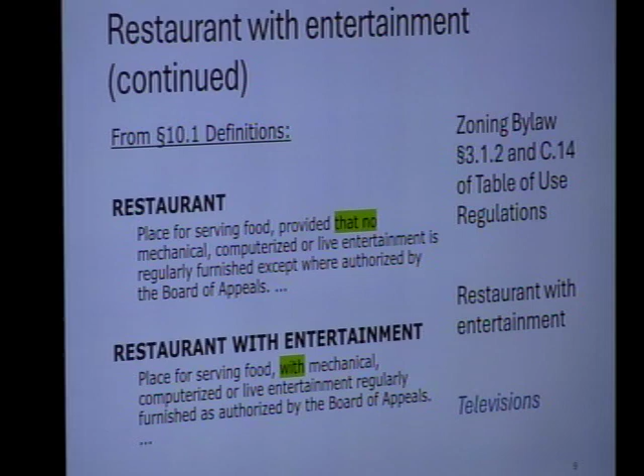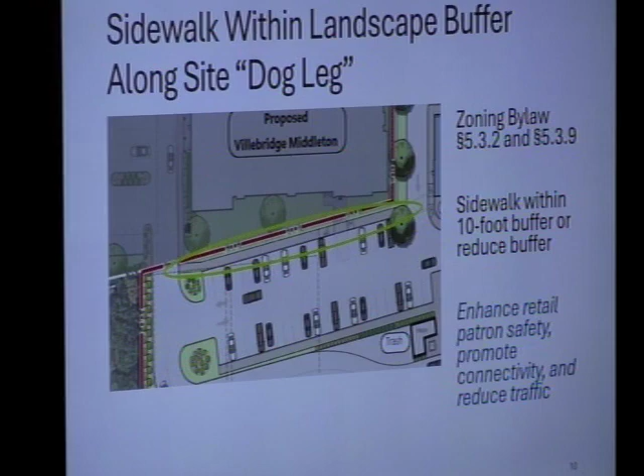The next special permit is about, technically, requesting to reduce the 10-foot landscape buffer, but essentially trying to get past a question of interpretation of the way the zoning is written, allowing us to have a sidewalk within the 10-foot buffer. We think that having the sidewalk here is a benefit for both the retail patrons and the residences, to have walkable connectivity, increase safety, promote connectivity, and reduce traffic — but nevertheless, that's the purpose. The alternative would be to just take out the sidewalk.

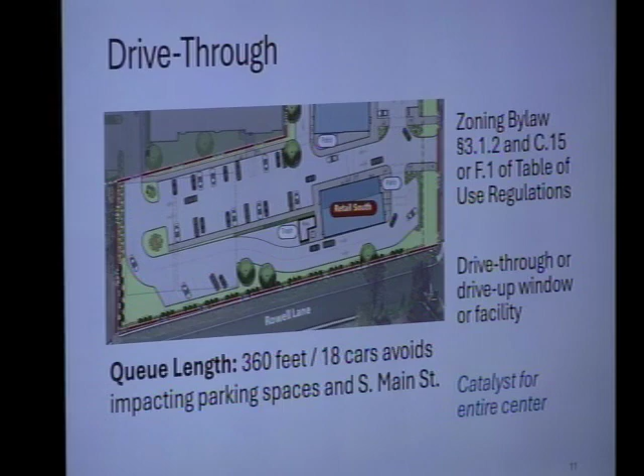And then the drive-through, which I know is the biggest point of contention. The queue length for the drive-through is 360 feet, so 18 cars, and that measurement is from here, so we could go even longer. But anyhow, it avoids impacting spaces on South Main Street. And the one thing I would say is that having a drive-through has a meaningful impact in terms of being a catalyst for the entire center, and I will walk through that a little bit here.

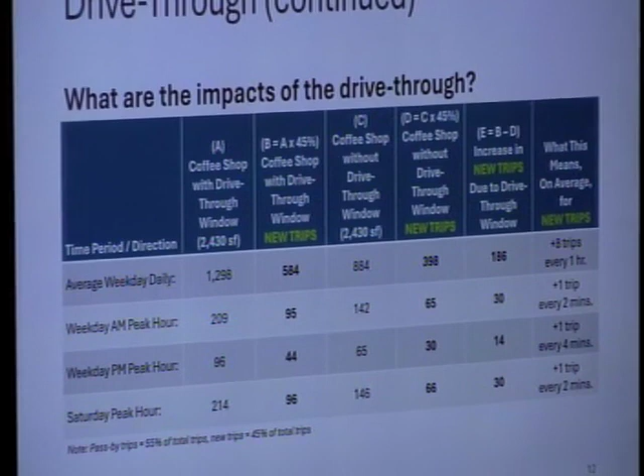So first, to talk about what the impacts are: as was mentioned in the last meeting, there are 209 trips associated with the coffee shop with a drive-through, but that's in totality. What we tried to break down here is what we're really talking about in terms of the difference. There are 95 new trips if it has a drive-through, and 65 new trips if it doesn't — people are already driving by, so those are new trips versus pass-by trips. So really the net impact of getting a special permit for a drive-through is 30 trips during the AM peak hour — one new car every 2 minutes. That's the worst impact over all the various peak hour analyses for adding the drive-through component, compared to just doing a coffee shop without it.

Just a quick question before you move on from that. One of the comments TEC had talked about how the analysis was done — really not looking at the number of pass-bys that would be coming in, because you're not generating trips. In all likelihood, somebody's already driving by who is going to come through. You're not, in all likelihood, having a lot of other folks who aren't already driving by here coming as a destination just to hit that coffee shop, right?

Correct. So I think TEC is looking at that because, and correct me if I'm wrong since Craig brought it up as well, it's the sticker shock of the number of cars, right? That's what it came down to, and I think most of the public was thinking the same thing. So I think you want to maybe look at that to address TEC's comment as a big one, right?

Yep. And then I would also suggest, one of the other things we mentioned was even looking at other spots, or the size of the coffee shop — because that's how they're getting those numbers. That's an awfully big coffee shop, right? Yep. And whether you're really going to have all those folks as a coffee shop, or if you're going to split it up into something else, you may be looking at the number of trips being an issue because of the coffee shop size and how conservative you were with your traffic numbers. Yes, so maybe I'll look at that chart. I'd like to add on to that, because I had a long discussion with TEC as well about this.

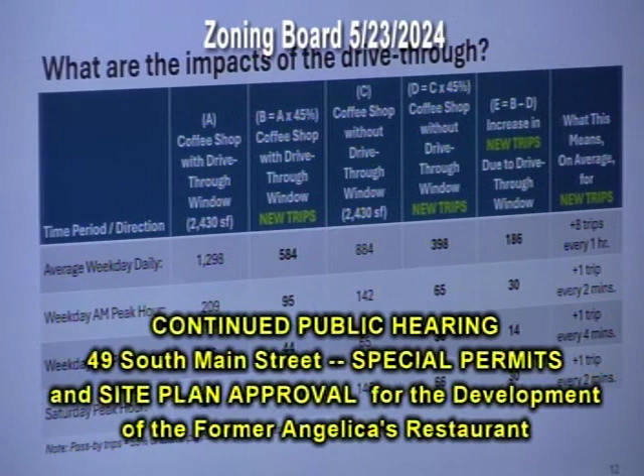So I think looking at this again, and I'm interested in hearing from TEC's perspective, because if you look at one thing and say okay, here are the factors that you use for a pass-by trip, so on and so forth - my colleague, Mr. Arnault, just said the same thing. I think it's probably over-conservative in terms of what this is gonna generate. That kind of a thing. So that's kind of how I'm looking at it from a traffic perspective.

So Aroma Joe's, when they submitted to us, looked and did an analysis based on obviously their model, right? Looking at that, remember that? It was basically best case scenario was like 4 minutes per customer. And if you look at Dunks, by the McDonald's, you'll see the same thing. That's queued, and you're not getting through that in a minute, never mind 4 cars.

So I think maybe just kind of looking at this stuff and taking another approach at it, it might make a little bit more sense to be more realistic to what this request is.

And just one last thing from my perspective. If this was a drive-through that potentially would have cars queuing up into the travel way, I would have a big problem with that. If you have cars queuing up on site, have at it, that's your issue. You're gonna want good circulation within the site. I don't think you would want traffic backed up on your site, and we've seen this recently down the street - it was backed up onto another street and around the building and all this other stuff.

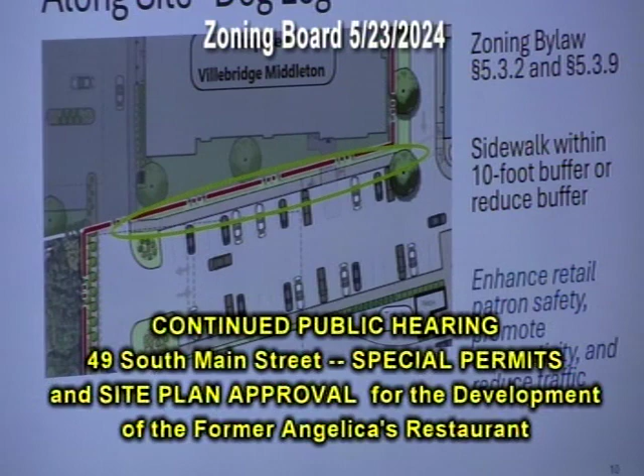So things like that. But one other thing I want to mention, it was a few slides before that. One of the permits was the sidewalk. As far as I'm concerned, we need to be accommodating pedestrian activity and connectivity. So something like this, I would hope that we would be doing. That's my personal viewpoint, but you can continue.

How are we doing? Twenty minutes. I'm moving as fast as I can, I promise.

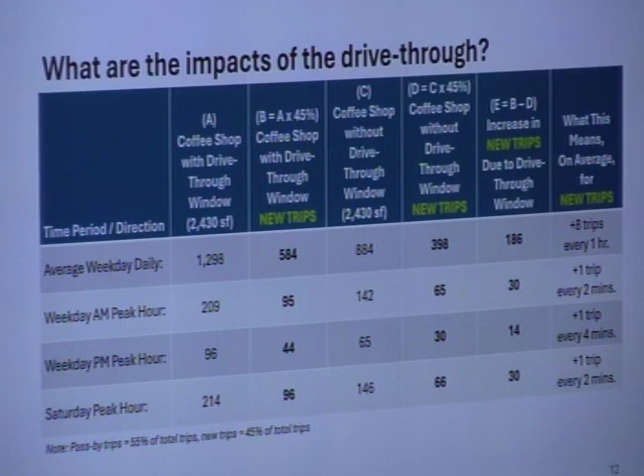So anyhow, using the analysis from Jeff, this is what the impacts are for just adding the drive-through. For the special permit for the drive-through, it adds one extra trip every two minutes, if all those numbers are right. Based on what we just talked about, it's probably even less than that in reality.

But the reason for the drive-through is to try to attract a higher quality operator. I know in previous meetings, some members of the board have expressed displeasure with certain operators. There's the chance of seeing them here. I share that view.

But to try and get the best kind of operator there, having a drive-through is important. The reason is the primary opportunity is for capturing commuters. It's a bedroom community where most patrons are leaving or coming back in the morning or the evening, and so the ability to capture business during those two ends of the day basically allows the business to supplement providing the all-day amenities of a place you can go and sit and stay.

It's what Starbucks used to be, where you'd always go there to hang out and meet with people. So again, the commuter sales subsidize the all-day amenities. This can also help create a sense of place, a place to go to and meet people and hang out as opposed to just grab a cup of coffee and leave again.

And again, it's a catalyst for the entire center. We're a neighborhood convenience center. We don't have a grocery anchor or something like that that's drawing traffic continuously, and something like this can serve as that continuous repeat user, which drives up the quality of the operators that come to the space.

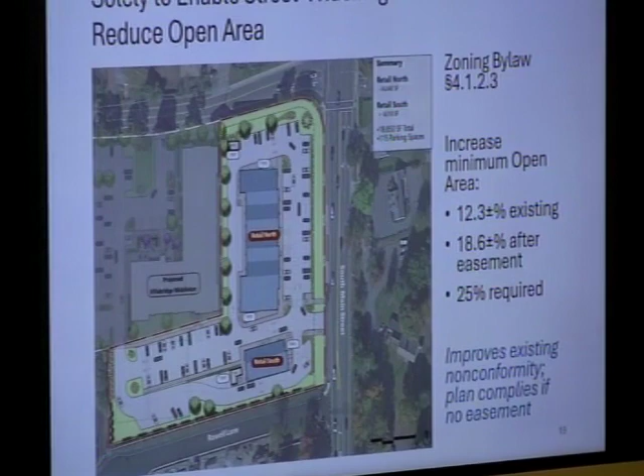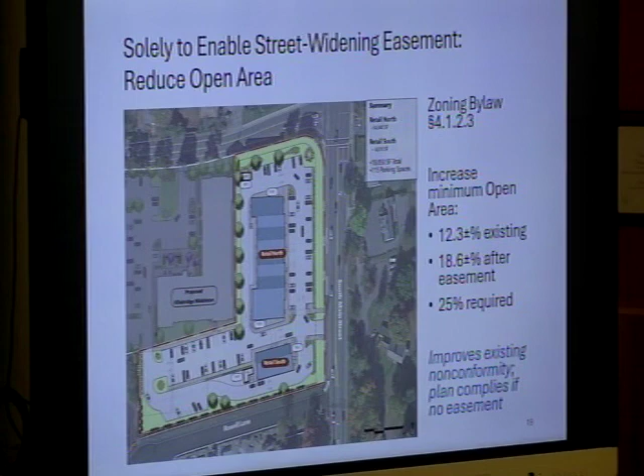So on reducing the open area, currently there's 12.3% open area. After the easement, there'd be 18.6%, which is better than 12.3, but less than the 25% required. So it's improving an existing nonconformity, and if we weren't doing the easements, this plan complies with the zoning. It's only because of the easement. And that's a reminder of how paved Angelica's is compared to what we're proposing to do here.

On the front yard, the requirements in the business district require 30 feet of open and green space in the first 30 feet of the front yard. On South Main Street, the existing minimum condition is 4 feet. We're proposing after the easement for it to be 6 feet, or again it would be 30 feet without the easement. So again we would conform. On Boston Street, currently it's 0 feet existing, paved right up to the edge of Angelica's. After the easement, it would be 18 feet of open green space. And again, if we weren't doing the easement, we would comply with the 30 feet.

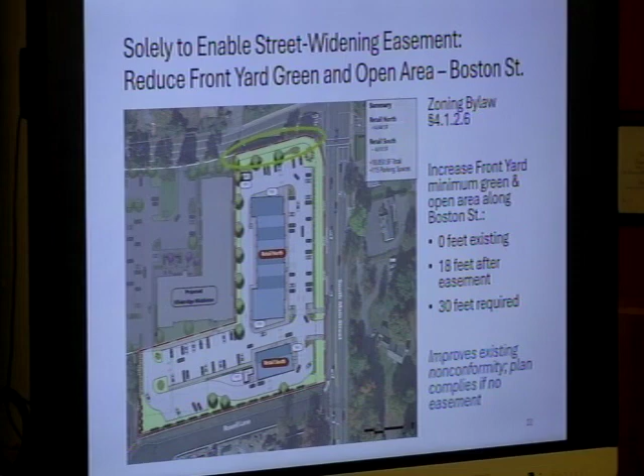So that is the rundown of all the special permits and why we're seeking them. I know there's concerns about the drive-through in particular, but I just can't emphasize how much it's important to us to try to get the tenancy to match what we think of the architecture and the rest.

Comments from the members at this point?

I guess my biggest comment is what's good for business doesn't necessarily mean it's good for the town, and I haven't heard anything that sways me that this is good for the town, the drive-through part. That was what I had specifically tasked you with: what's the benefit to the town? I know it's a benefit to you and to your development, but how does the town benefit by having a drive-through there? All I see are issues, and you're talking about drawing people into that development. Personally, I'd rather they keep driving, because that's fewer interactions in that intersection we'd have to deal with if they just kept going. So I have a hard time seeing the benefit to the town by having a drive-through there. I gave you marching orders last time to come with some benefits that outweigh the adverse effects, and I'm not hearing them.

Okay, just being very clear that I have not heard that. Okay.

Okay, Ann? You don't think upping the quality of that store would be a benefit to the town? No. I think you can have an equally good cafe there that does not have a drive-through, that encourages sit-down customers, but to have any drive-through there, I have not seen anything that adds a benefit to the town. There's outdoor seating in other places throughout the site — those are great, there'll be great seating areas, and I would encourage people to go down there 100%, but there's no benefit to the town in my eyes by having a drive-through there. It's only adverse effects at this point, and trying to mitigate those adverse effects.

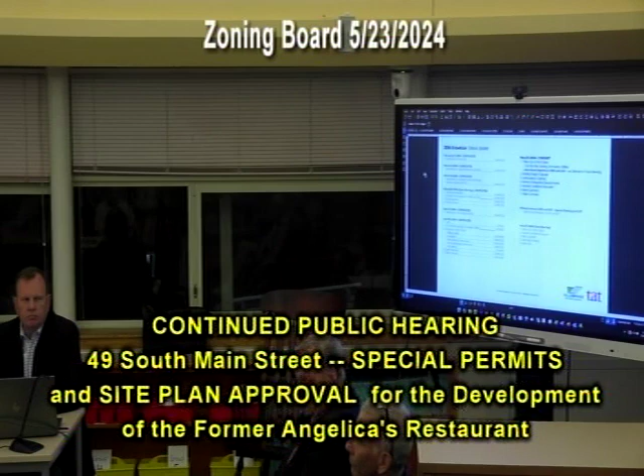Well, I would say you're not gonna get a higher quality coffee tenant without a drive-through in this current market. That's a business decision. That's not a town issue.

No, you're just not viewing that as a benefit. Right, I don't see the additional tax revenue as a benefit that outweighs the impact on traffic.

But what about the residents? So, as you all know, probably my biggest focus on this particular project has been the traffic, no question. I need to fully understand, because I'm with you in terms of this adding another nightmare to traffic.

If, however, the peer review from TEC and the traffic evaluation from VAI demonstrates that, you know, while we're always concerned about these drive-throughs and what they generate—for example, the Dunkin' Donuts up on North Main Street—I don't know who did the sight distance evaluation there, but when you come around that corner, that driveway's right there. I would have never approved that, ever.

But it's there, right? How many cars is that generating? Sometimes those cars back out onto 114. You come all around the corner, and there it is.

If the traffic data and the peer review from TEC says, you know what, don't even think about this, I have the same concerns as you. If they think that the mitigation associated with the improvements and what this establishment generates is traffic less than what we'd be willing to accept, then that's a different conversation for me. You know what I mean?